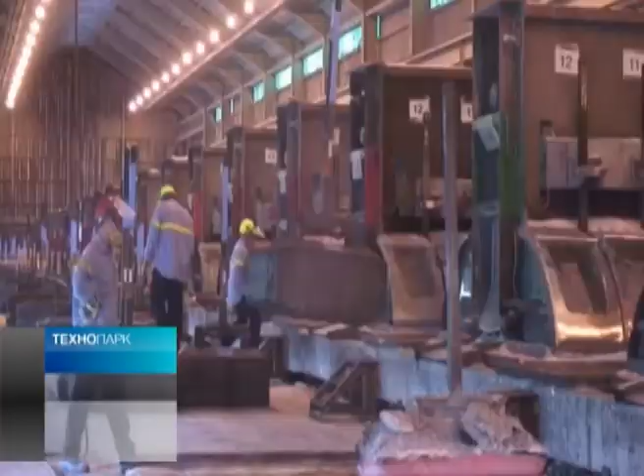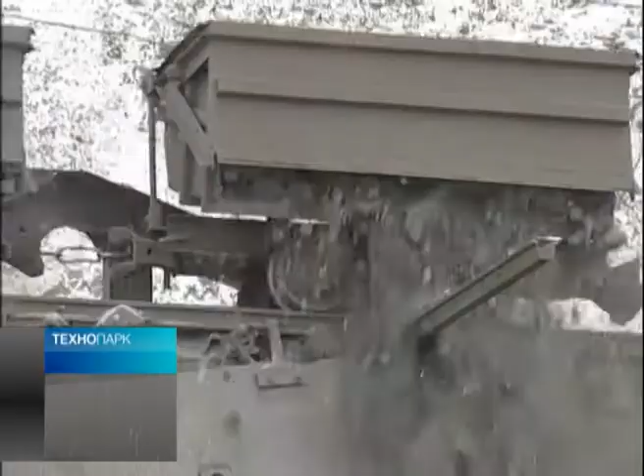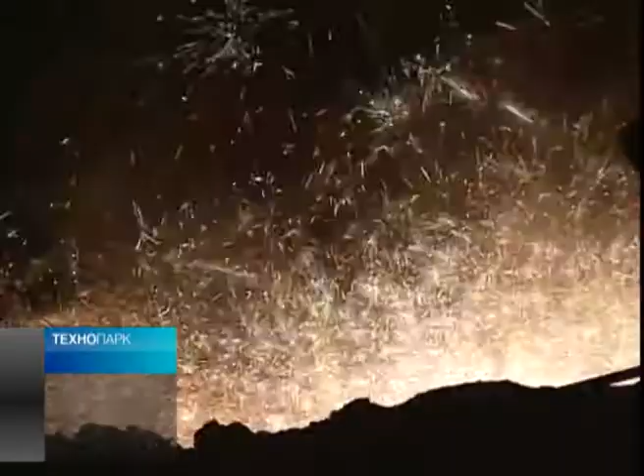September 2013, Alcoa, the American metallurgic giant, closed a number of aluminum smelters throughout Europe within a month. The same situation happened in the western part of Russia. Rusal scales down aluminum production at several smelters at once. There is only one reason: the market of winged metal is congested and unprofitable. The industry needs qualitative modernization of production facilities.

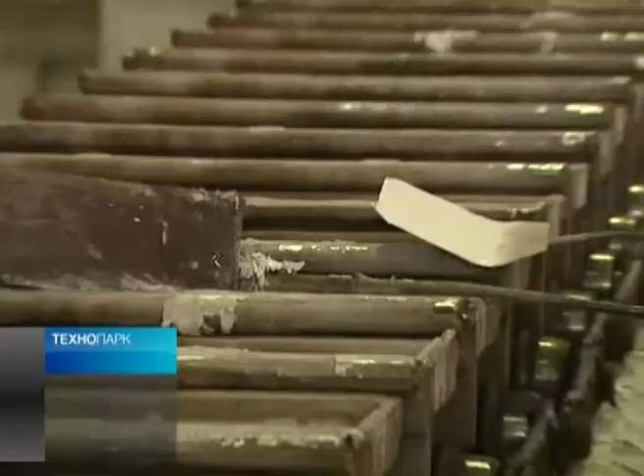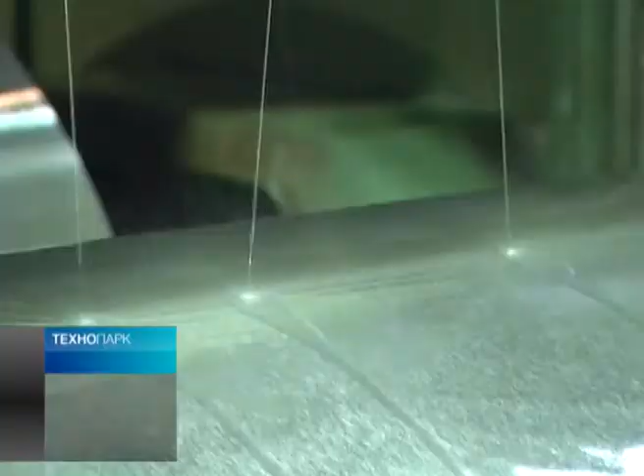How can we save aluminum industry? Can the innovative developments make production of the winged metal cheaper? What solutions are engineering companies ready to offer to aluminum giants? Is it possible to earn money with them? You will learn about it in the Technopark program.

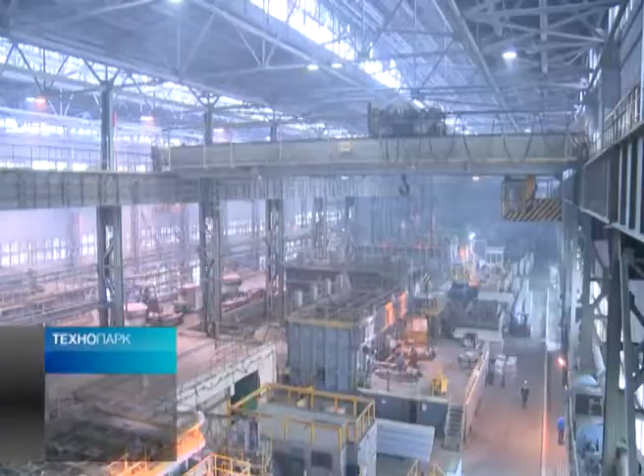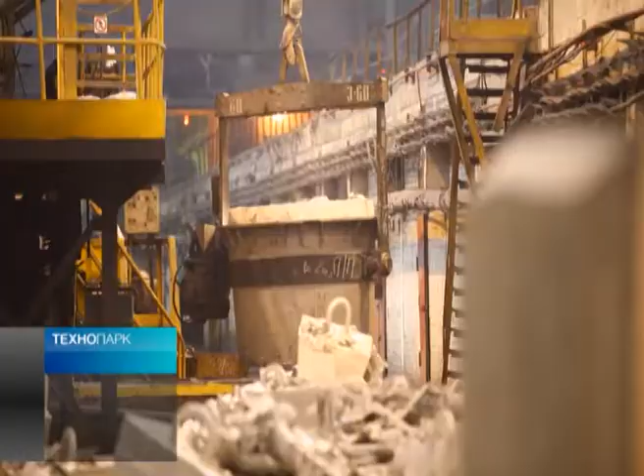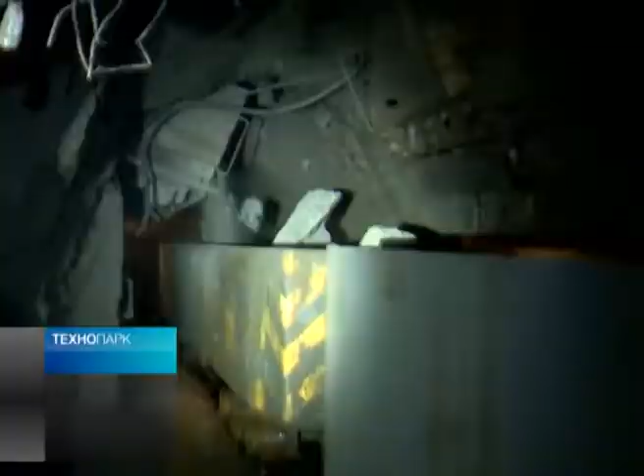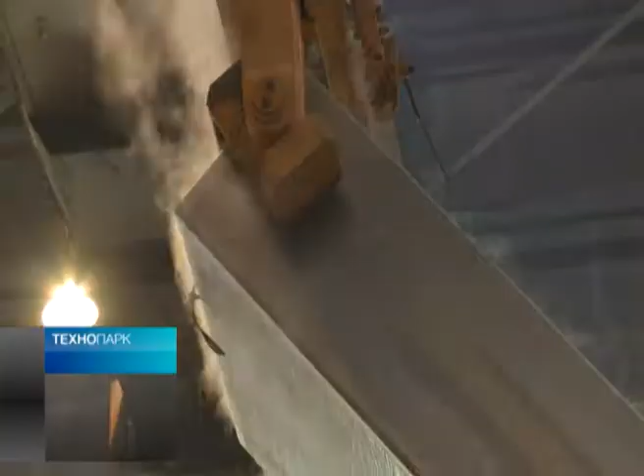Aluminum is the most common metal on the planet. Its content in the Earth crust is 350 times higher than the total content of copper, chrome, zinc, lead and tin. But there are no aluminum ingots in the nature as compared with gold, platinum and other metals. That is why the technology process of aluminum melting significantly differs from other metallurgic productions. Today we obtain aluminum from clay using electrolysis like 200 years ago.

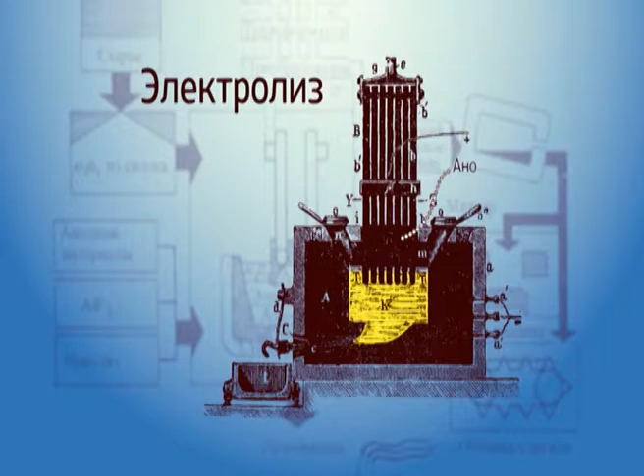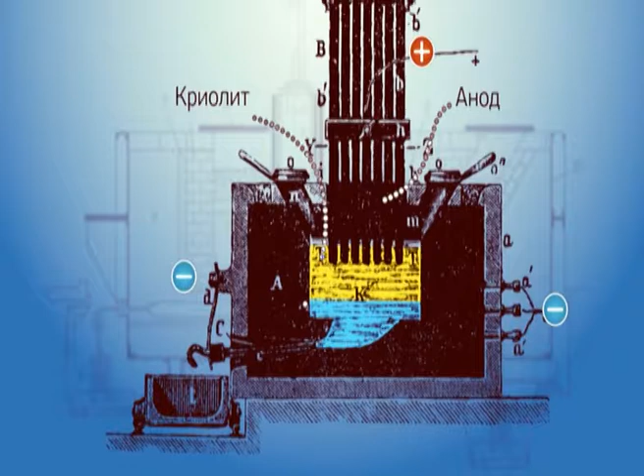The process is the following. Special baths are filled with cryolite by 80–90%. It's a complex salt which dissolves the basic raw, aluminum oxide or clay. Then current is passed through this metal bath. As a result, liquid aluminum is accumulated on the bath bottom, in cathode. The obtained alloy is poured in ladles and sent to the cast house.

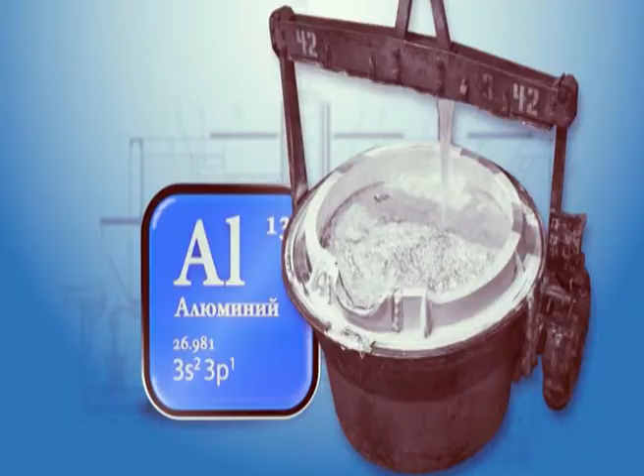Melting furnaces and holding furnaces are the basis of melting and casting production at Krasnoyarsk aluminum smelter. It's a special equipment for manufacture of aluminum alloys. The company installed these holding furnaces at Krasnoyarsk aluminum smelter in 2006. They are the largest holding furnaces in the company. Capacity of each furnace is 100 tons. They are used to manufacture alloys in the form of rolling ingots, which are processed into canned products, products for lithography, rolled metal products, etc.

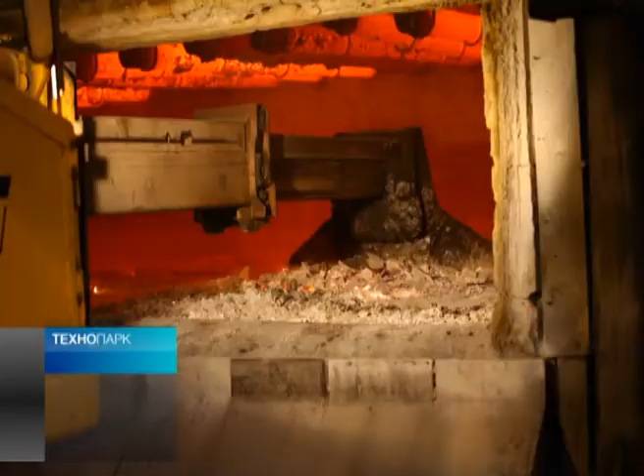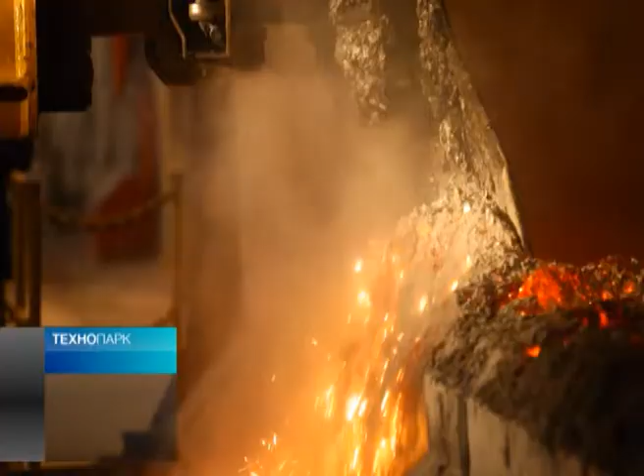Furnaces and holders comprise the entire melting and casting complex responsible for metal mixing, temperature maintenance and other aspects of metallurgic production. Today, Krasnoyarsk engineers are engaged in development of this unique equipment. Those two largest holding furnaces in Russia were designed in this very room. Though the volume of designed furnace is not so important for designers, the high priority task for them is quantity of parts in the equipment. For example, those holding furnaces from Krasnoyarsk aluminum smelter included about 2,000 parts.

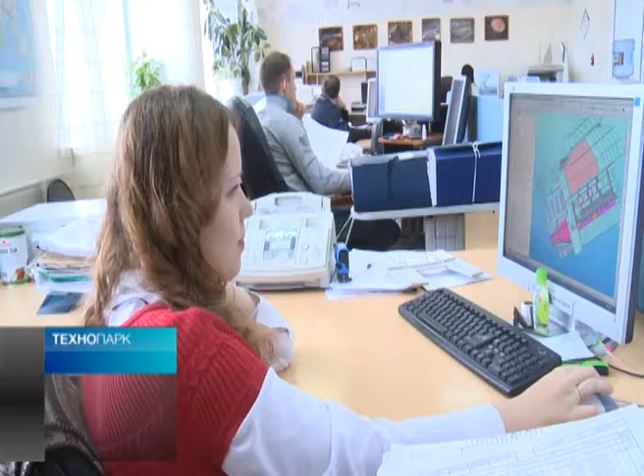As there are many parts, manual development of a holding furnace, even with some existing groundwork, takes about half a year, and that is for design department consisting of 5 employees. Design and development of 100-ton holding furnaces for Krasnoyarsk aluminum smelter took almost the same period of time. English partners helped Russian engineers.

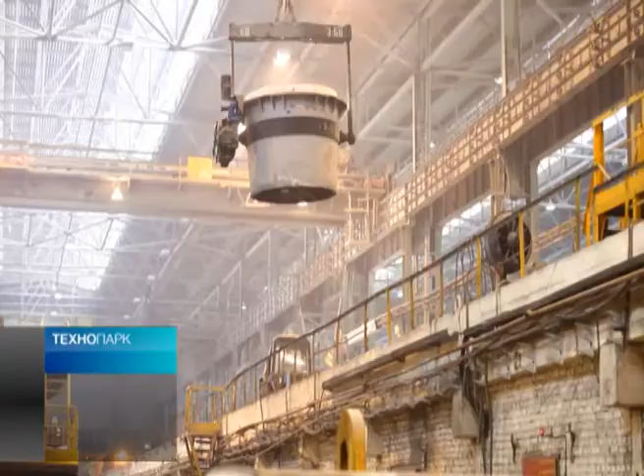We already had work-in-process inventory, which was much cheaper but less trustworthy. We were offered to negotiate cooperation, taking best projects and organizing production in Krasnoyarsk, and thus reducing the cost for the client. That was the way we did. Nowadays, about 7% of aluminum in the world is produced using the equipment developed and manufactured according to that scheme.

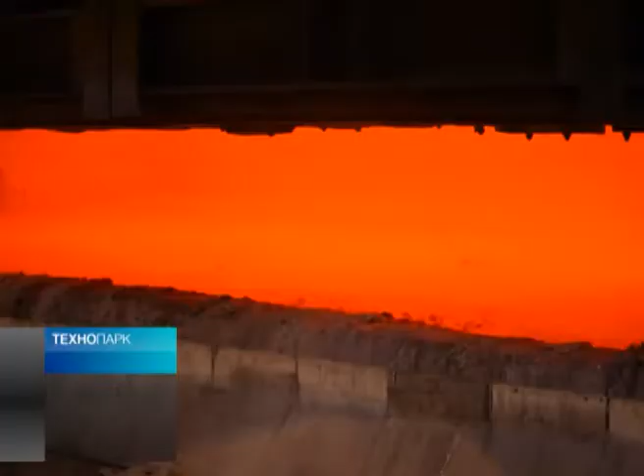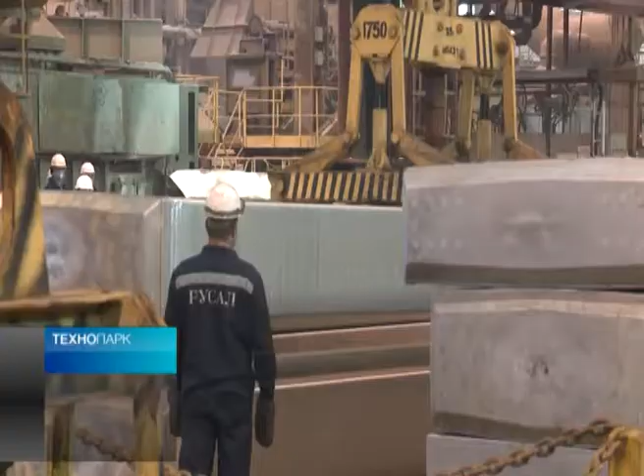The main criterion is quality of the obtained alloys. The final product, whether it is an in-orbit satellite or a common can, directly depends on its quality. Let us consider a simple example: Coca-Cola can. If the supplied metal contains impurities, the cans will leak. Despite the fact that the equipment has not failed for 6 years, the technological process requires to take samples at each stage of winged metal production.

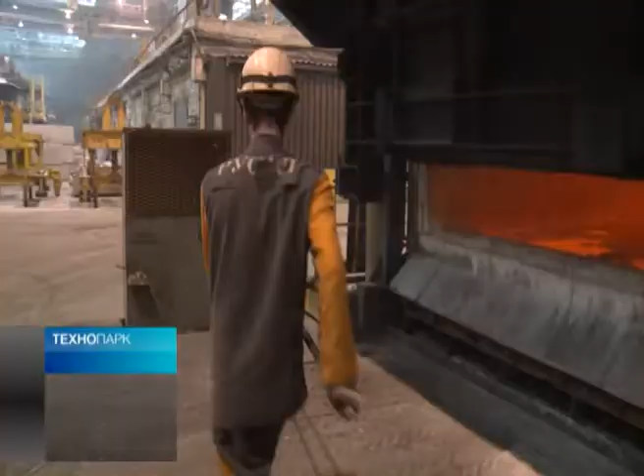For this purpose, such a disc, after cooling down, is sent to the laboratory for chemical analysis and further certification. Metal history begins with the pot room and ends at the final consumer's location. Each metal lot has its own identification number, its own chemical composition, which is linked to that number. In fact, it's a certificate of the metal, so-called melting practices sheet. Using this document, you can trace every process the metal has undergone.

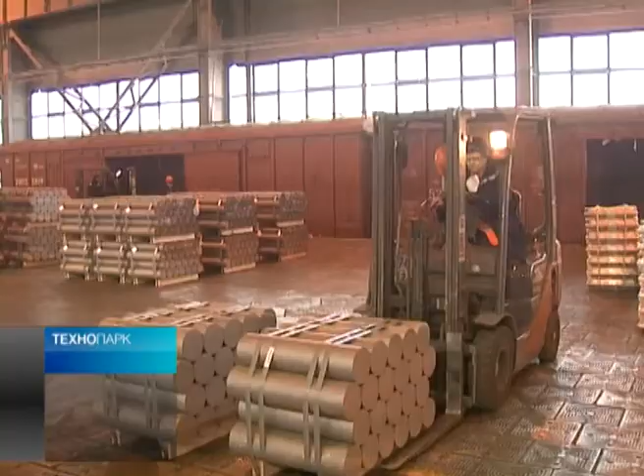Aluminum in its pure form is rarely used. Generally, enterprises need aluminum alloys. The most popular alloy today is duralumin. Due to copper, magnesium and manganese impurities, duralumin is much harder and stronger than aluminum, but metal ductility is the same. Actually, this alloy is the winged metal. It is used for aircraft and rocket bodies. Electromagnetic stirrer is responsible for quality of alloy preparation in the holding furnace.

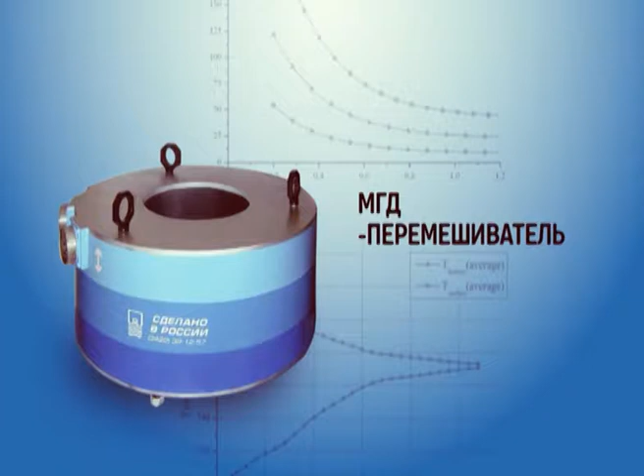Previously, the mixing process required manual labor, that is, casters worked in the high-temperature area, spent much manual power in preparation of molten metal, as molten metal mixing requires addition of many charging materials.

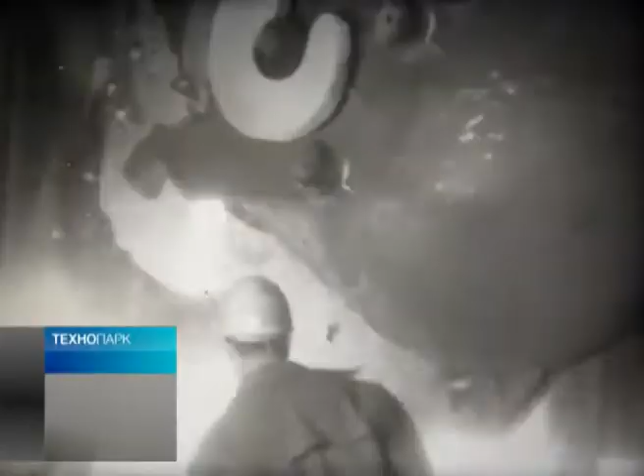Metal preparation required much time. Today, electromagnetic fields play the role of a caster with a furnace rake. The principle of electromagnetic stirring is that intensive molten metal flows are generated under the influence of traveling magnetic field in the furnace. Thus, the hearth content is thoroughly mixed.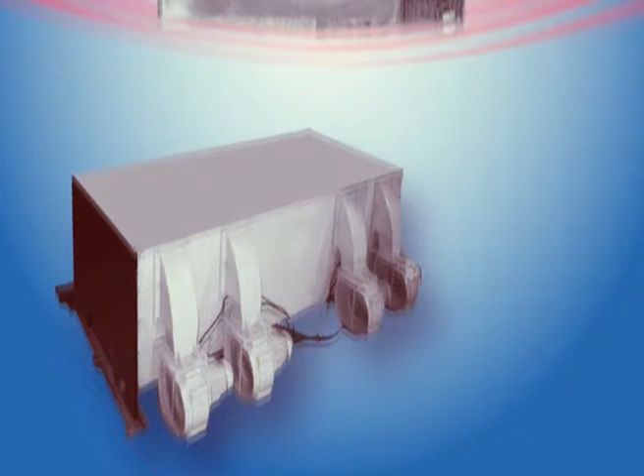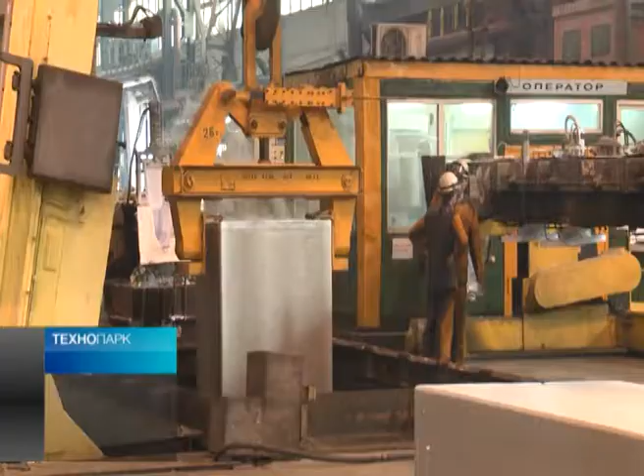The main element of the electromagnetic stirring system is inductor. It may be installed both under and alongside the furnace. Electromagnetic stirring ensures even distribution of mixture in the furnace bath. Therefore, it becomes homogeneous. Metal quality is the customer's requirement, and it affects quality of the finished product.

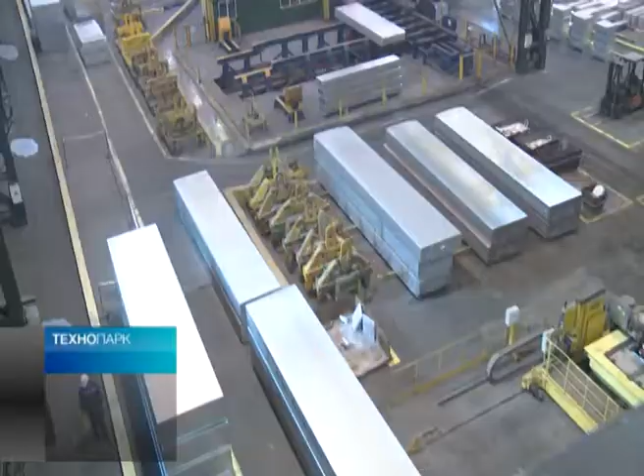Nowadays, Russian electromagnetic stirrers are popular worldwide. American engineers who came to Krasnoyarsk to sell their technical solutions were so impressed by the developments of Siberian engineers that they concluded agreements to receive exclusive rights to represent companies' interests abroad. The business model offered by the Americans fitted in the engineering company's concept, which is the research and production center now.

It's rather hard for a Russian company, which is unknown to foreign customers, to supply its product to reputable foreign customers. First of all, the reasons are high requirements to the products, appearance, requirements to power supply, network contamination with upper harmonics, etc. The second thing is brand. It is easier for a reputable firm, for example an American one, to sell a product than for us from scratch.

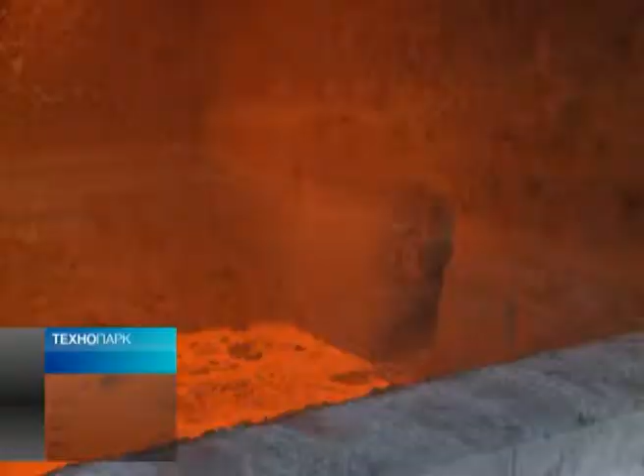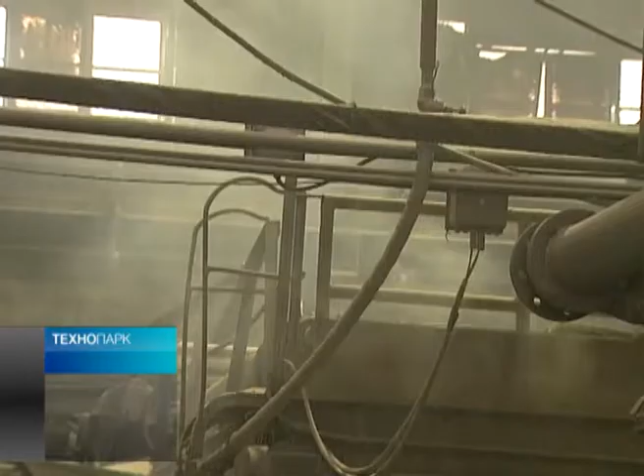Heating elements were a soft spot of Russian melting and holding furnaces for a long time. Severe operating conditions put out of operation expensive electric heaters in a matter of months. The reason is that aluminum is one of the strongest oxidizers. Liquid aluminum is able to dissolve even ferrum.

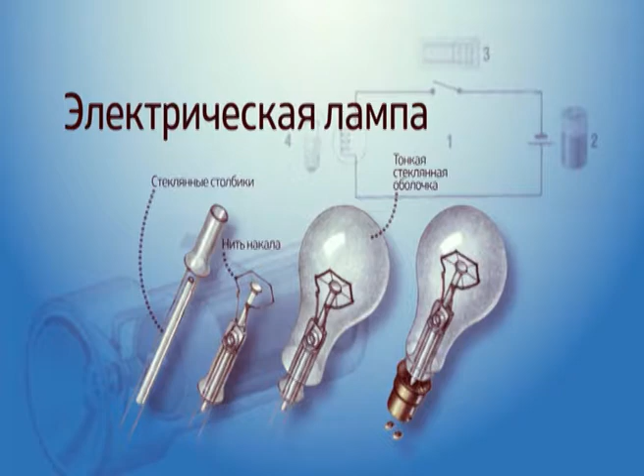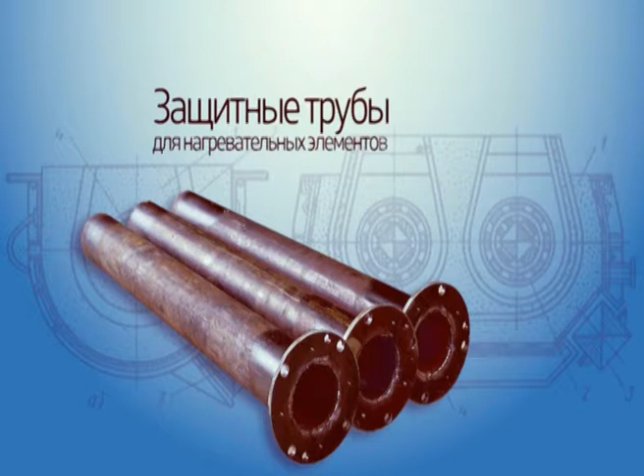We made sure that they operate perfectly with simple aluminum alloys. When complex alloys were required, we made sure that they met the reliability requirements, and then we decided that we should deal with them. The suggested solution was to embody the heating element in a metal enclosure like a lamp. Problem was to find an alloy able to withstand the temperature up to 1200 degrees and withstand the impact of aggressive environment.

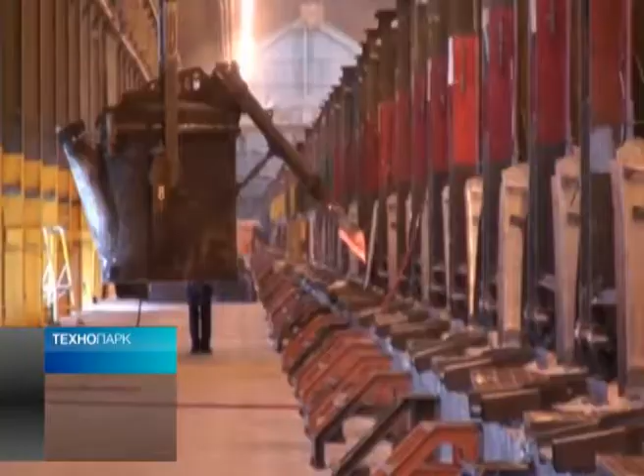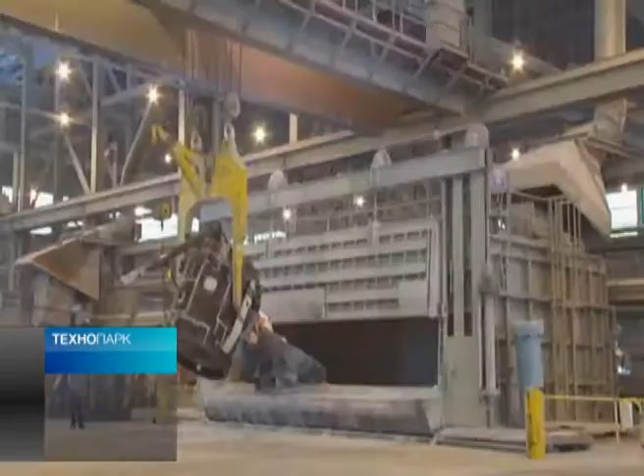Speaking about heating elements, they are 1.5 times more expensive than our heating elements. Probably we win competition due to this difference. Customers like cheaper and more reliable products. However, entering Western markets is not always smooth. The market is competitive, and often technological advantages of products alone are not enough to convince the customers to switch to a new supplier. Some customers believed in us, some smelters. Some are hesitating, but we look forward with optimism and hope that we will be the main suppliers in Russia.

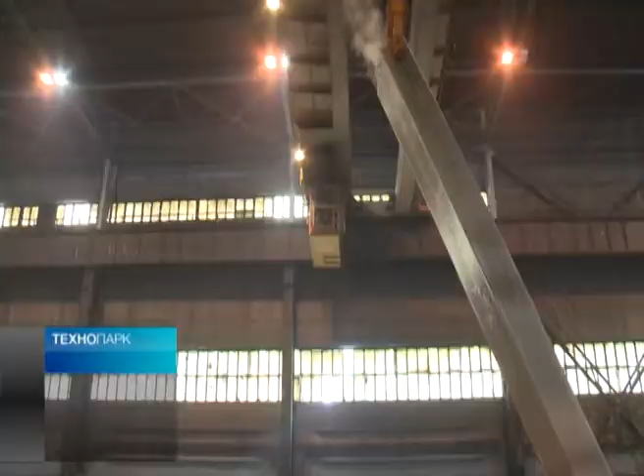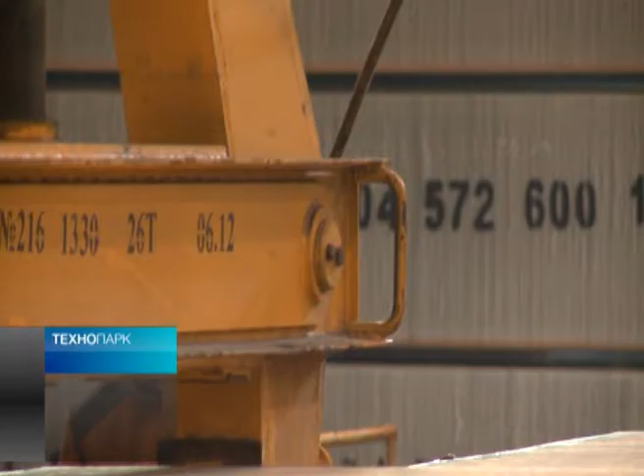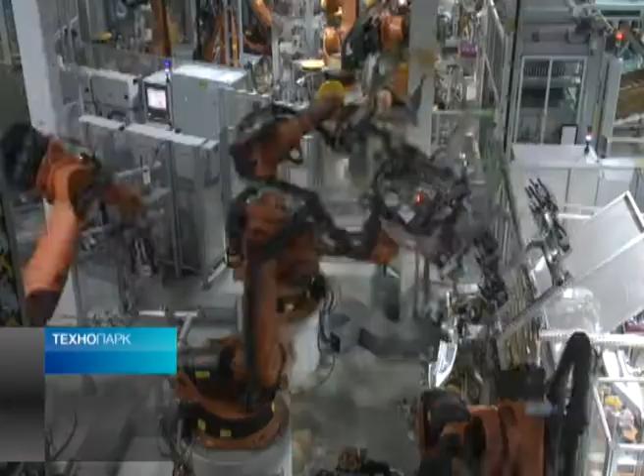The final stage of aluminum production is obtaining a rolling ingot, slab. At Krasnoyarsk aluminum smelter, that ingot is a 20-ton bar. After cooling down, they are marked and sliced for further transportation. The shape of finished ingot depends solely on its further application. It may be cogging for production of foil, or aluminum cans, or die forming for production of car body parts, or drawing for production of high-voltage wires. The latter technology is considered to be the most expensive one.

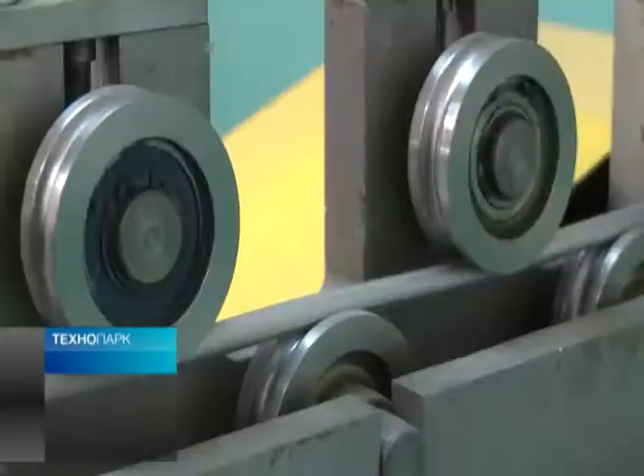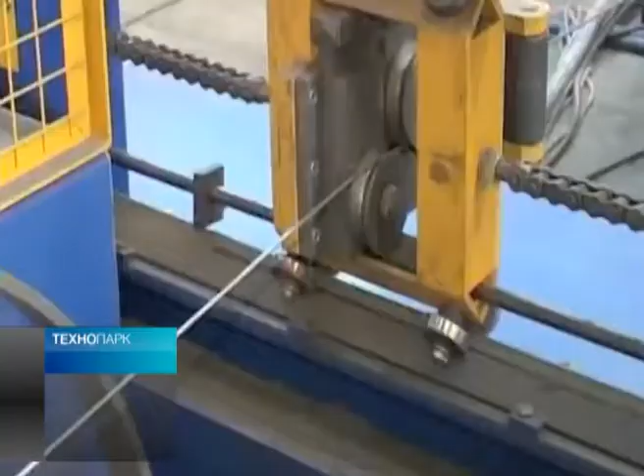The reason is that the minimal width of the bar suitable for these goals is limited by 15 centimeters. To obtain wire of 0.5 mm diameter, it shall be put through the rollers 300-400 times. The Research and Production Center is conducting tests of continuous casting machine for production of aluminum bars. In fact, this machine may make the process of drawing much cheaper, as it can produce castings with diameter not exceeding 2 centimeters.

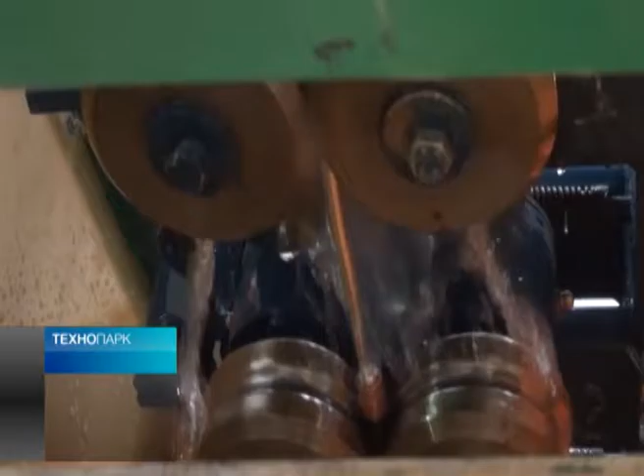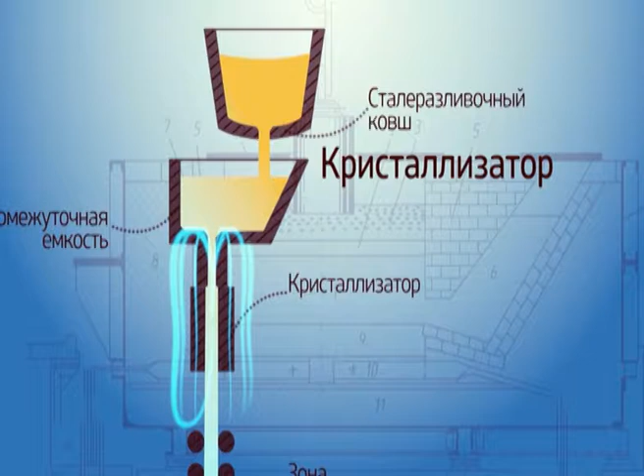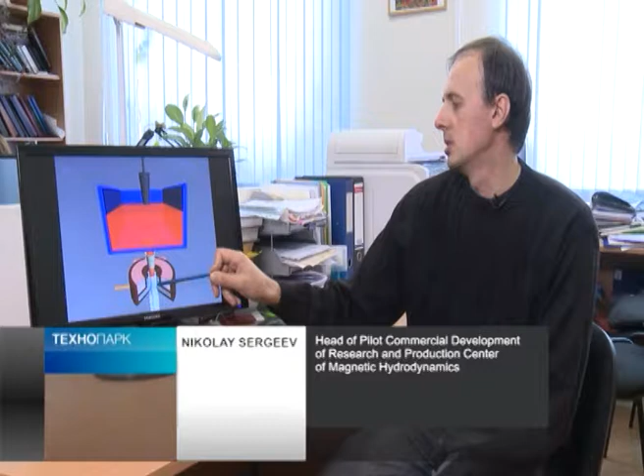The essence of this technology is special casting forming equipment. It generates electromagnetic field which retains melted aluminum in the air. At the same time, the casting is cooled down. Finally, we obtain metal with a unique nanostructure. Due to this, the casting acquires unique physical and mechanical properties suitable for production of wire of 0.1 mm diameter.

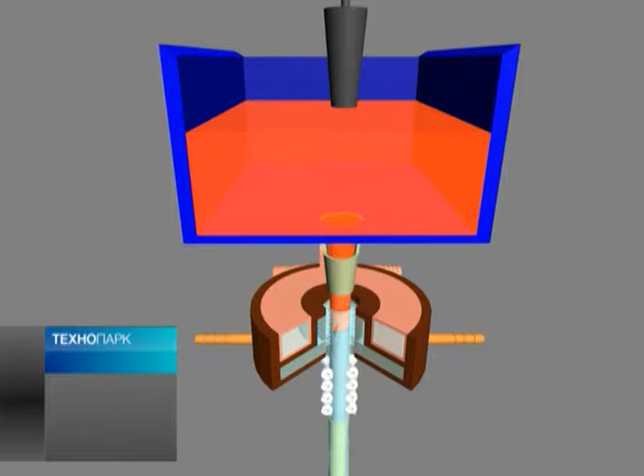Currently, this project is being considered by Rosnano. If they approve it, Research and Production Center of Magnetic Hydrodynamics will become one of the largest engineering companies in the aluminum industry. Certainly, we are interested in industry performance. Engineering companies are able to load the industry today. Why? Because if we have projects, we fulfill orders for them.

For example, steelworks. Have you ever seen how many tons of steelwork are there in our one furnace? It's a machine building plant. We place orders to it, it is busy, goes on operating, improves technologies, etc. It's very important. If we support Russian engineering, we will save our industry.

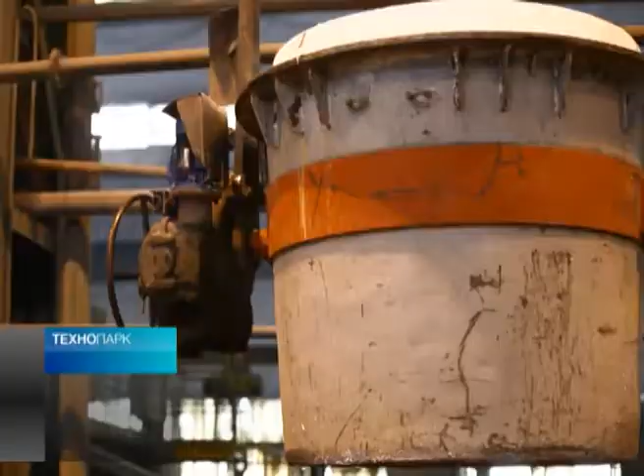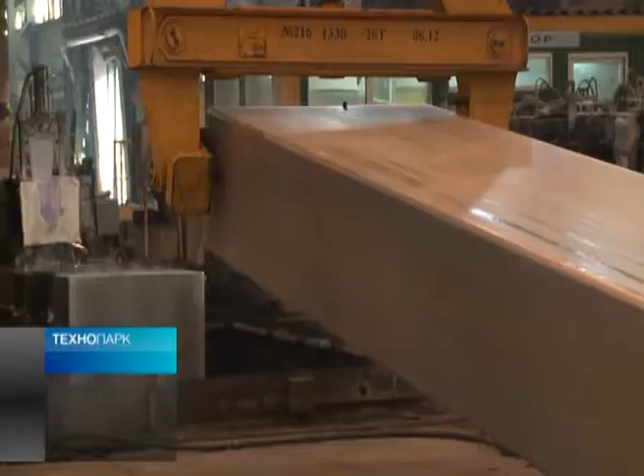Employees of the Krasnoyarsk company managed to reduce production costs of wing metal over 10 years of work. And it is Krasnoyarsk aluminum smelter alone. But nowadays, the company's equipment is installed in Bratsk, Sayanogorsk, Taishet and Irkutsk. This example proves again that engineering is the right way forward for Russian industry to produce competitive products in the world market.